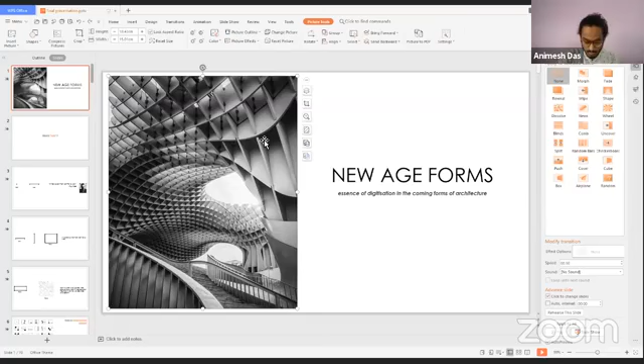Is it visible? Yes, bingo, let's go. Yeah, okay.

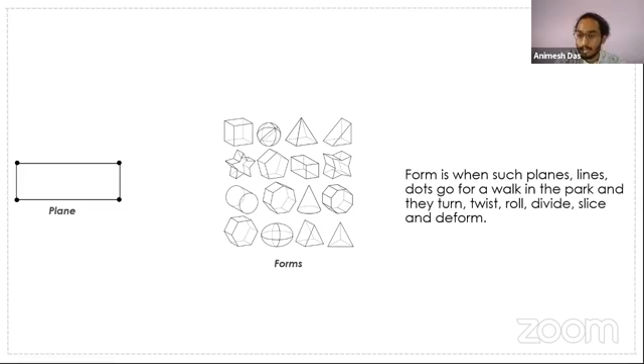But artistically, Paul Klee, who was also known for his work in the Bauhaus period and is a famous pioneer artist of that period, defined a line as a dot that went for a walk. We tried to copy the same concept and define the plane as a line that went for a walk. Henceforth, form is when such planes, dots, and lines go for a walk hand in hand into the park, and they turn, twist, roll, divide, and deform.

Coming to the second most important fundamental of designing, that is composition. Composition of forms is something we deal with in our day-to-day life. Composition means, in Latin, to compose - that is, to make whole from different parts. A square frame can be composed in a fundamental pattern with the help of forms.

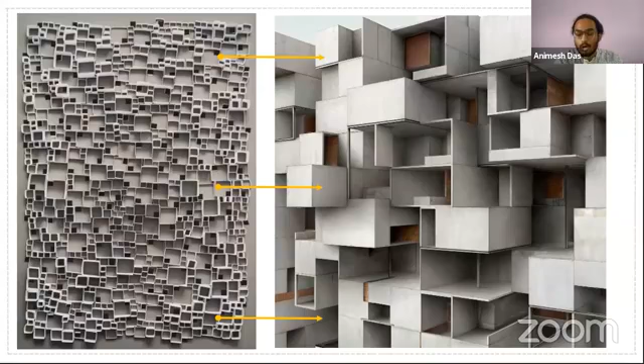Here you can see how dots have transformed into a certain type of compositional form. Lines have transformed into compositional forms as well. And how a 2D surface transforms into a compositional form that we, as architects, know as a volume, space, or void.

But basically we will be discussing the modern and postmodern styles of architecture, because these two styles are very impactful in making new age forms and designing the new trend of form that is presently very much effective.

Okay, so first we will start with modernism. What is modernism? The style of architecture that emerged in the early 20th century is known as modernism. There were many architects, Louis Sullivan, Mies van der Rohe, who coined phrases like 'form ever follows function' and 'less is more.' These were meant to suggest that buildings should be designed so that the essential structure and function should dictate the form.

Another iconic architect, Adolf Loos, in his manifesto 'Ornament and Crime,' created a huge outrage in which he termed avoiding ornament as a sign of spiritual strength.

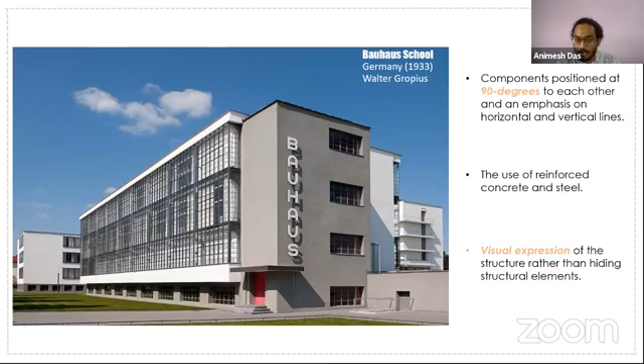And later, there come two famous architects that we as students admire a lot and know very well: the founder of the Bauhaus movement, Walter Gropius, derived modernism in certain dimensions - following 90 degrees, following the bandwidth of horizontal and vertical lines. Visual expression should come from the structure of the building rather than any extra elements added for good purposes. The second is Le Corbusier, with the very famous building Villa Savoye.

Here you can see the fundamentals of modernist architecture: white clean facades, rectangular grids, and large windows, which describe the five fundamentals of Le Corbusier's buildings that he provoked, as well as the fundamentals of modernism in architecture, which was very influenced by the industrial era of those times.

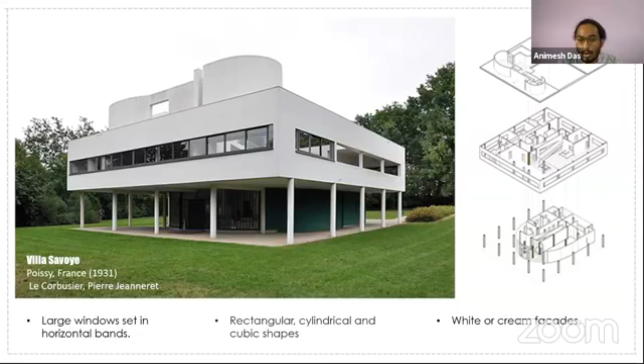Now there is conflict everywhere. When modernism came, there was conflict: should this be the only form? Should this be the only composition of form that should be followed across the world?

Then came many architects who started questioning the sterile aestheticism of post-war buildings that were directly copied from industrial ideologies. Following this movement, there were architects like Zaha Hadid and Oscar Niemeyer. Zaha Hadid said there are 360 degrees, so why stick to one? Oscar Niemeyer said form follows function, but I would say form follows beauty, or even better, form follows feminine.

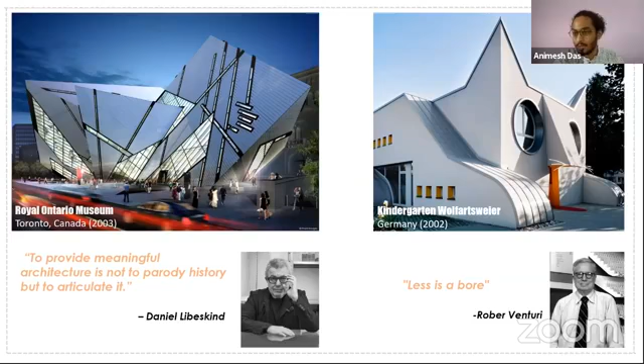There were other architects as well, Daniel Libeskind, Robert Venturi, who participated very enthusiastically in this movement. The main motto was to question the fundamentals of modernism and choose another domain of practicing architecture by redefining form, which gave birth to a new style we today know as postmodernism.

The next topic we will be discussing is what is the present scenario? What is it going to be after postmodernism? Is postmodernism the end of the architecture fraternity, or is it the deadline?

With that, I would share a small quote by Robert Venturi. He said modernism is about space and postmodernism is about connection. You should do what turns you on.

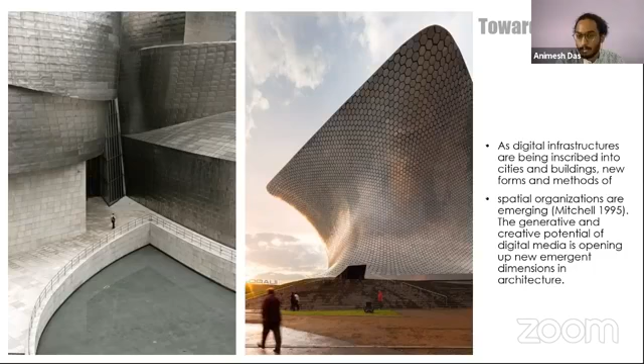With the change in society's pattern and way of living, a trend of digitization came into everyone's lifestyle, also in the architectural fraternity, leading to new age forms of digitizing through building. Based on these digitized categories, we have picked out 6 digitized forms given in the book named Hybrid Space, written by Peter Zellner. These 6 categories may not be mutually exclusive, but they show certain distinctive characteristics. These 6 categories are provided on the screen.

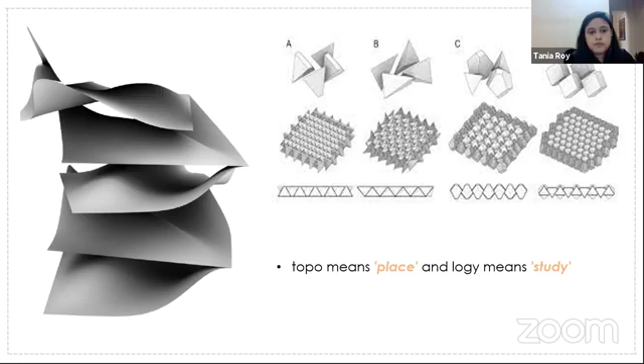The word topo means place and logy means study, so topology means study of place. The topologification of architectonic forms according to dynamic and complex configuration links architectural design to a new and often spectacular plasticity in the footsteps of organic expressionism.

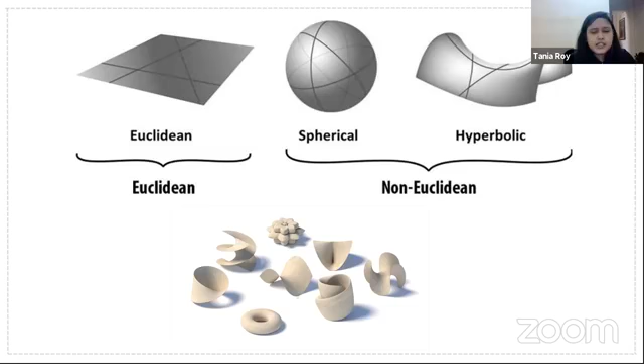Topology is mainly opposed to the Euclidean geometrical representation of space. When a Euclidean wall associates itself to other flat surfaces like walls, ceilings, and floors, it is simple to define an inside and an outside.

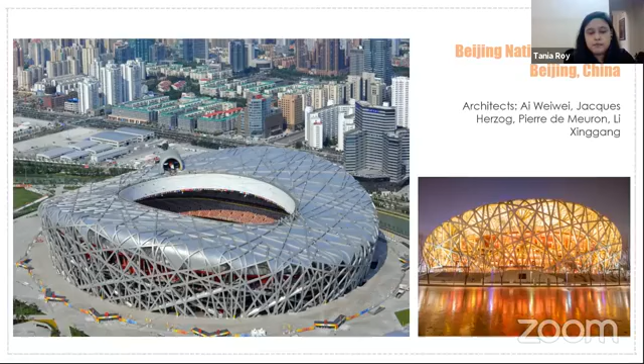Guggenheim, Bilbao, Spain, by Frank Gehry. The museum multiplied its exhibition space in a mountain of stone, glass, and titanium that follows the contour of the Nervion River, which flows in front of the museum. The concept of this form of the museum is taken from the river.

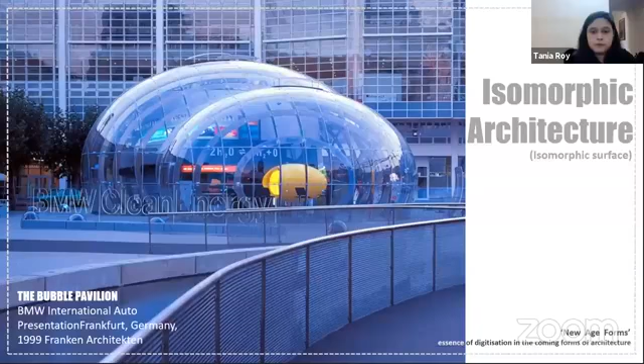Our next category is isomorphic architecture. The word isomorphism derives from the Greek word iso, meaning equal, and morphosis, meaning to form or to shape.

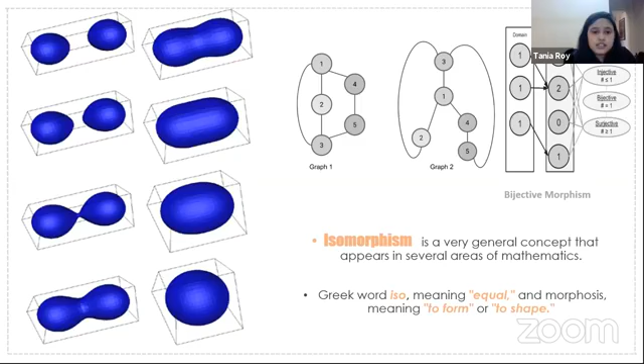It's a very general concept of mathematics. Isomorphism is mainly bijective morphism, but sometimes it acts as a map that preserves sets and relations among the elements. In this figure, it shows the process that two forms or two elements are connected to each other and create a single form. Basically, the process is called isomorphism.

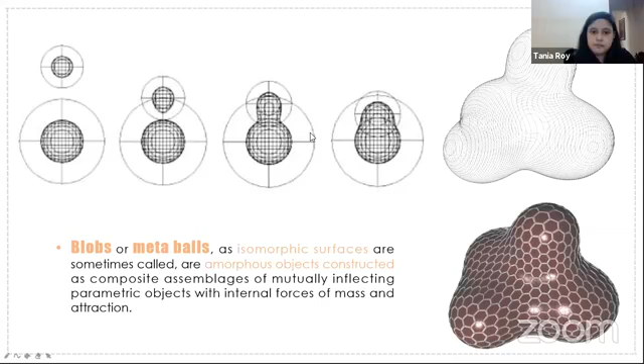Blobs or metaballs are the basic units which help to form an isomorphic surface with their internal forces of mass and attraction. Those isomorphic surfaces are formed by addition or subtraction of metaballs. The addition of metaballs acts like the cell division process, like meiosis and mitosis.

The geometry constructed by a complete field which has some intensity is called an isomorphic surface. When two or more isomorphic surfaces are connected to each other, it forms an isomorphic polysurface. Blob, which means binary large object, is the basic unit of this. Blobs have a center, a surface, and a mass area relative to other objects, with internal forces due to mass attraction. Two blobs form a polysurface step by step, acting like the mitosis process of cell division.

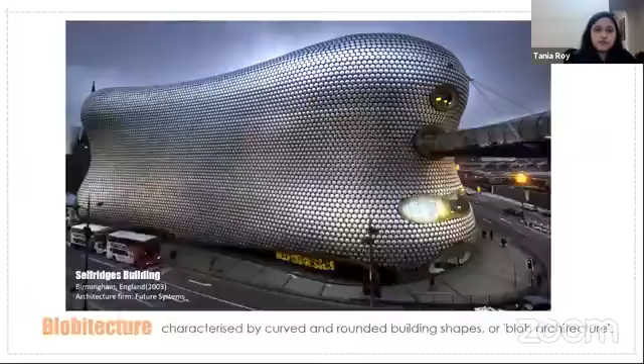Blobitecture, also known as blobism, is a term given to postmodern architectural style characterized by curved and rounded building shapes, or blob architecture. Blobitecture buildings appear to have an organic form that is soft and free-flowing, yet come together to produce a complex whole. We can see this process in the Selfridges building in England.

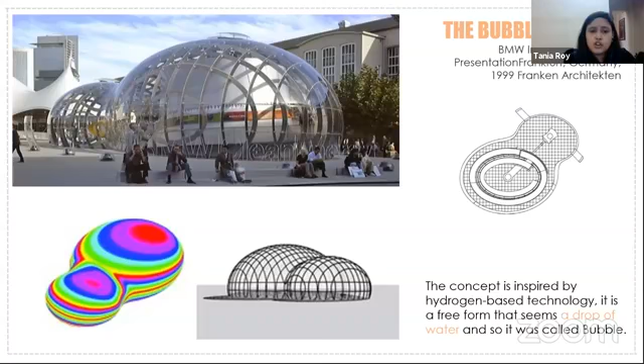The building of BMW Pavilion, or Bubble Pavilion, at the International Motor Show in Frankfurt represents a new direction in architecture, and it is a very good example of isomorphic architecture. This relatively minor construction project enables the architects to approach one step closer to the architectural vision of new age forms. The concept of the form came through two water droplets. Here, two connected metaball or blobby structures influence the creation of this form. The concept is inspired by hydrogen-based technology. It is a very free form that seems like a drop of water, and so it was called a bubble.

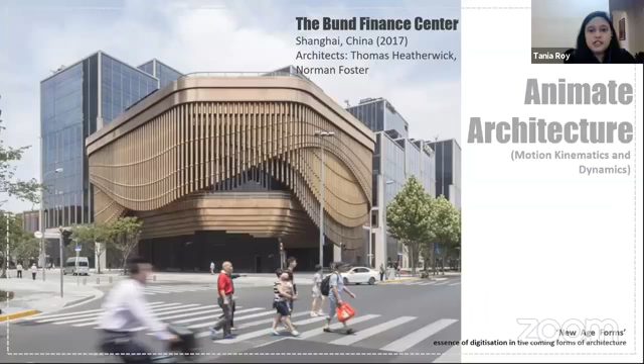Our next category is animate architecture.

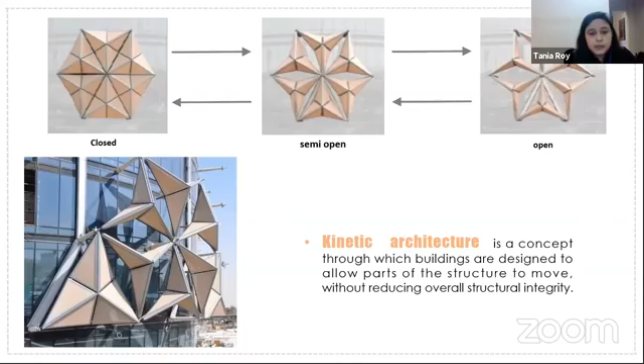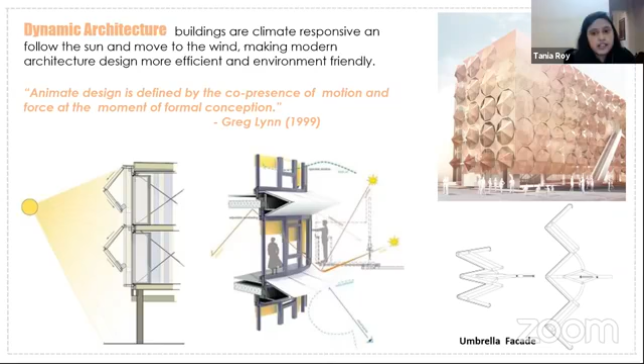Kinematic studies are made without consideration given to mass or external forces, while dynamics takes into consideration physical properties such as mass, elasticity, and physical forces such as gravity and inertia. Dynamic architectural buildings are mainly climate responsive. In this diagram, some dynamic building facades are shown, and this umbrella facade follows opening and closing methods like an umbrella.

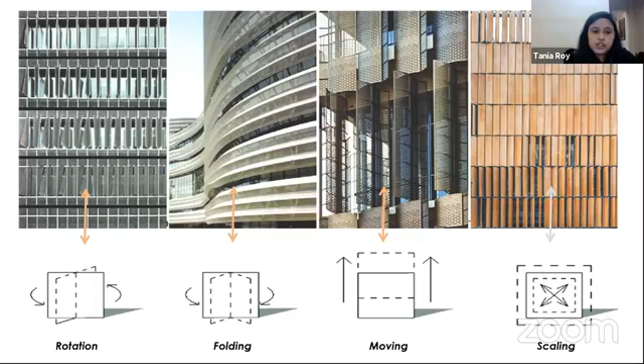The four main typologies of building facades which influence the animate facade are rotation, folding, moving, and scaling.

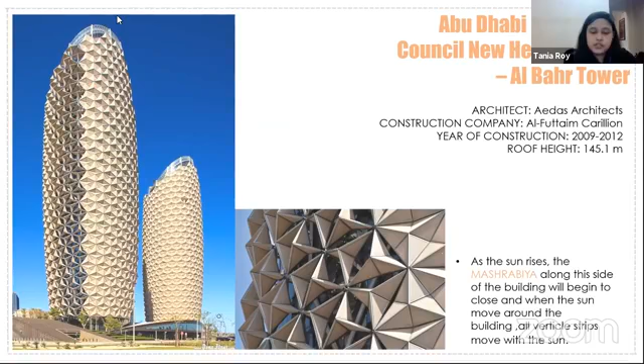Next comes the building facade of the Abu Dhabi Investment Council, a good example of animate facade. The design is based on the concept of adaptive flowers and mashrabiya, a wooden lattice shading scheme. As the sun rises in the morning, the mashrabiya along the side of the building begin to close. As the sun moves around the building, all vertical strips of mashrabiya move with the sun. At night, the screens fold, allowing more of the facade of the tower to show.

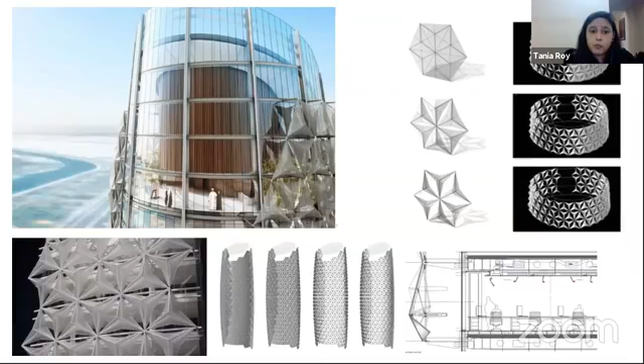Basic modules are shown here. The whole lattice structure covers the building facade. The circular plan form was articulated to reduce solar exposure to the most heavily exposed elevations, and in doing so generates a natural orientation. The form of the towers was then sculpted around the core, narrower at the base and top, but broader around the intermediate floors.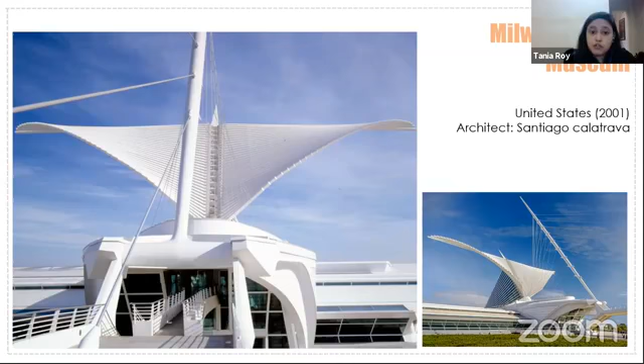Milwaukee Art Museum, by Santiago Calatrava. World famous architect Santiago Calatrava was one of the three designers of the museum, with his distinguished pavilion. The pavilion of the art museum gained fame due to its movable sun shield, with a 217 foot wingspan, that folds and unfolds according to the time of day.

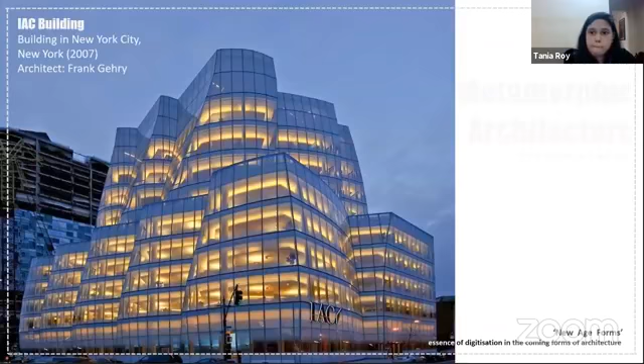Our next category, metamorphic architecture, represents the concept of creating a simple form and then selecting a suitable transformation modifier such as bending, torsion, lattice box, morphing, etc. to change the form.

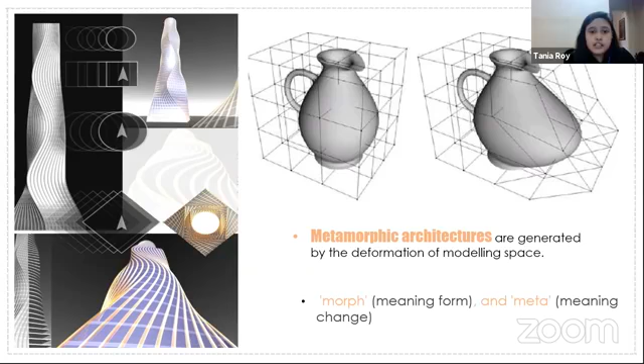Here, morph means form and meta means change, so metamorphosis means change in form. The modifier is selected according to the concept. Metamorphic architecture is generated by deformation of modeling space. Mainly the concept is derived from metamorphic rock, a type of rock that has been changed by extreme heat and pressure. Here morphing represents additional deformation and transformation techniques which involve a time-based strategy.

Key shape animation, deformation of modeling space, and spline curve and path animation are the forms which include metamorphic generation. As an example, path curve deformation happens after stretching, rotating, and twisting.

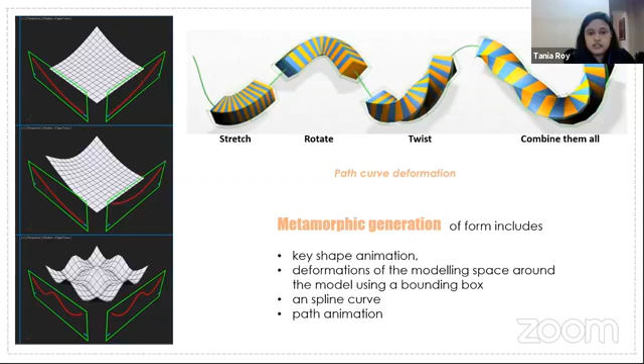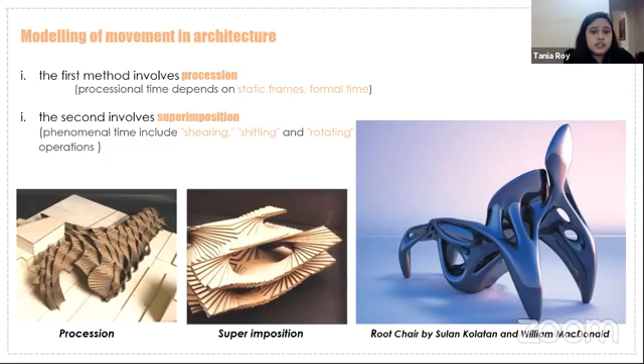Procession and superimposition are the two methods which help in modeling a metamorphic structure. Procession time depends on static frame and formal time. Superimposition includes shearing, shifting, and rotating operations. Other techniques for metamorphic generation of form include deformation of the modeling space around an object using a bounding box, a spline curve, or one of the coordinate system axes or planes.

Gehry Tower and IAC building, designed by Frank Gehry, are good and very easy to understand examples of metamorphic architecture. Those buildings are designed on the concept of twisting the path curve.

The next category is parametric architecture. The term parametric originates from mathematics and refers to the use of certain parameters or variables that can be edited to manipulate or alter the end result of an equation system.

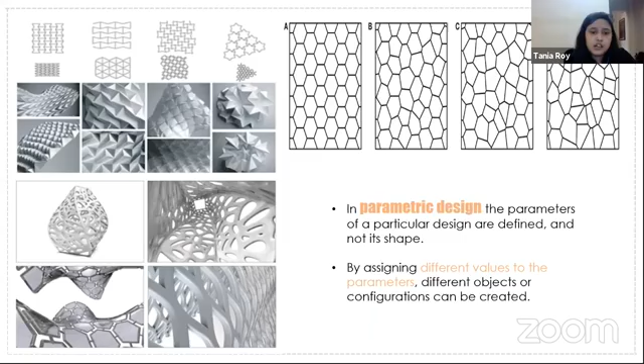In parametric design, the parameters of a particular design are defined, not its shape. By assigning different values of parameters, different objects or configurations can be created. It is defined by control parameters such as dimension, angles, relative distances, etc. Parametric equations are a representation of a curve through an equation as a function of variable parametric statistics, a branch of statistics that assumes data has come from a type of probability distribution.

Parametric design is divided into three basic formations. Those formations are based on seed geometry, repetition, and composite pattern.

For the formation based on seed geometry, the fundamental unit of pattern is known as the cell, and the arrangement or breakdown of the actual pattern born out of repeating the cell, identifying these elements, makes it possible to produce new patterns.

For the formation based on repetition, it is a part of the geometric composition known as the symmetric repetitive pattern, because it depends on the single repetitive elements regardless of the complexity of composition.

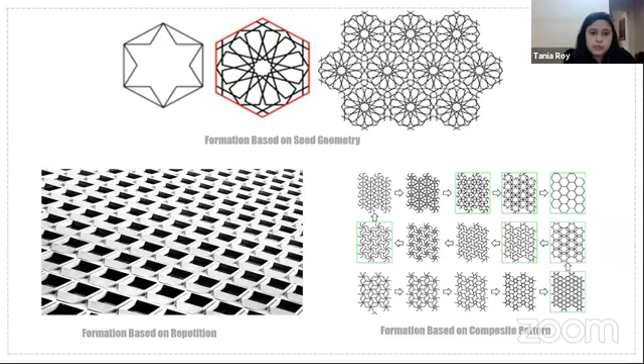In the next formation, based on composite pattern, different types of decorations are combined, and the basic cell can be used to produce a contrasting background. The combination of different decorative elements affected design formations.

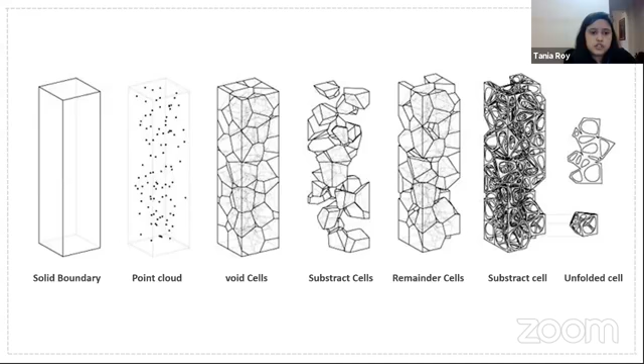Here the figure shows the developing notion of forms through computational processes.

Museo Soumaya, Mexico City, by Fernando Romero. The shell of the building is constructed with 28 steel-cut columns of different diameters, each with its own geometry and shape, offering visitors a soft, non-linear circulation throughout the building.

The Museo Soumaya is a visual example of how architecture develops into a new phase where gravity is defied, walls are curved, levels are cantilevered, and circulation is therefore more free. And last but not least, letting natural light into the space becomes key to the best presentation of art on display.

Our final category is evolutionary architecture.

An evolutionary architecture design is designed for incremental change in architecture as a first principle. Evolutionary architectures are appealing because change has historically been difficult to anticipate and expensive to retrofit. If evolutionary change is built into the architecture, change becomes easier and cheaper, allowing changes to development practices, release practices, and overall agility.

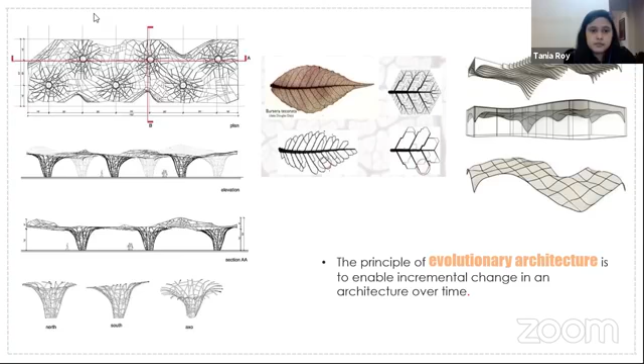Genetic algorithm is a search heuristic inspired by Charles Darwin's theory of natural evolution. The algorithm reflects the process of natural selection, where the fittest individuals are selected for reproduction in order to produce offspring of the next generation. The key concept behind the evolutionary approach to architecture is the genetic algorithm, a class of highly parallel evolutionary adaptive search procedures.

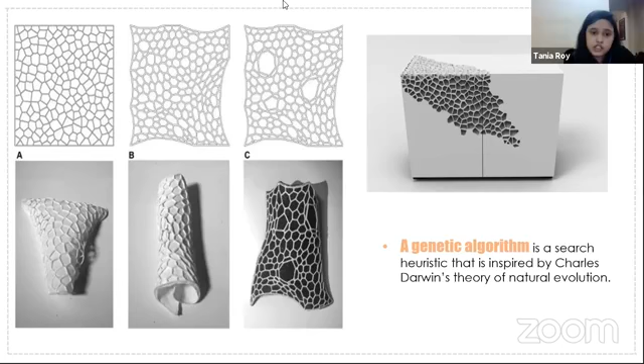The Gherkin skyscraper in London, by Norman Foster. The building, commonly known as the Gherkin, mimics the shape and lattice structure of the Venus flower basket sponge. The lattice, exoskeleton, and shape of the sponge provide strength and stability. The hollow basket formed by the skeleton filters water for nutrients as well. The structural elements of the building are connected at different angles on each floor due to its shape.

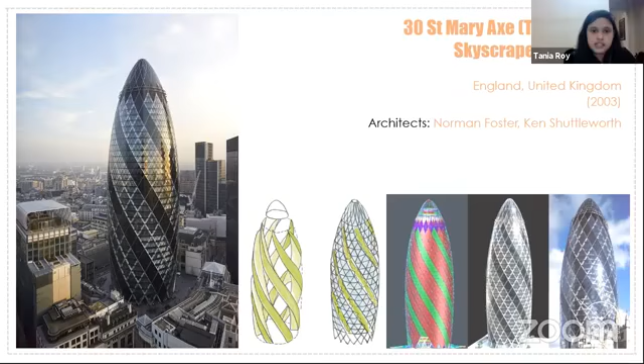Arab World Institute, a cultural institute in Paris. The adaptive facade of the structure mimics the movement of the human eye. The cladding of the structure acts as an automated eye that responds based on conditions during the day, while the kinetic facade on the south maintains thermal exposure. This helps control the entry of light into interior spaces and maintains thermal comfort.

Now back to Animesh.

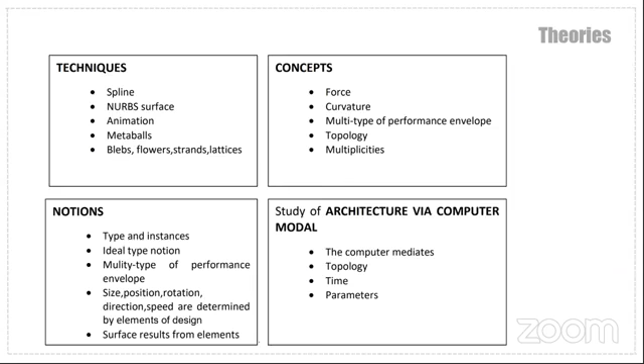the domain of design modeling is changing in recent years. The major shift is from the Euclidean geometry of straight lines to the non-Euclidean geometry of spherical and hyperbolic spaces. Fluidity is becoming the new trend now.

Coming to the process of modeling, there are generally two types of modeling process: one is polygon and the second is NURBS, which means non-uniform rational B-splines.

The main difference between polygon and NURBS modeling is the way the mesh is calculated by the computer. For polygon models, it calculates polygons which are flat planes that comprise a 3D shape. The way a cube is made out of 6 squares is the best example of polygon modeling.

NURBS calculates the mesh as splines between points, which can make curves out of a single section of geometry. It uses complex mathematics to calculate the surface of the model. This means it is better suited for models where a high degree of accuracy is needed.

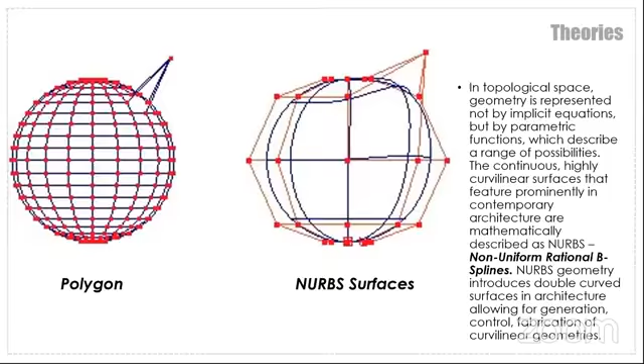To summarize the difference between NURBS and polygons, it is compared roughly to the differences between vector and rasterized images in 2D. NURBS modeling comes with control points that can be used to get a higher accuracy of curve in the model.

Coming to the forms in India, Indian modern architecture has seen some of the most exquisite forms. Some examples are the Hall of Nations by Raj Rewal, which is sadly no longer with us, the Parliament Library, the Indian National Science Academy, the Central Library of IIT Kanpur by Achyut Kanvinde, and the most important design by Fariborz Sahba, the Lotus Temple, which remains very important in modern India.

That is all from the modern Indian context. Now, we are all aware that these sort of forms we have discussed are associated with a lot of maintenance, high building calculations, high building processes, and a high amount of price. So is it the most ideal form of architecture design that we will go on to discuss?

To sum it all up, we are left with some questions that will be discussed in future, if time allows. First, is it the most ideal form of architectural design? Or do these forms only satisfy the inflated ego of the master architect?